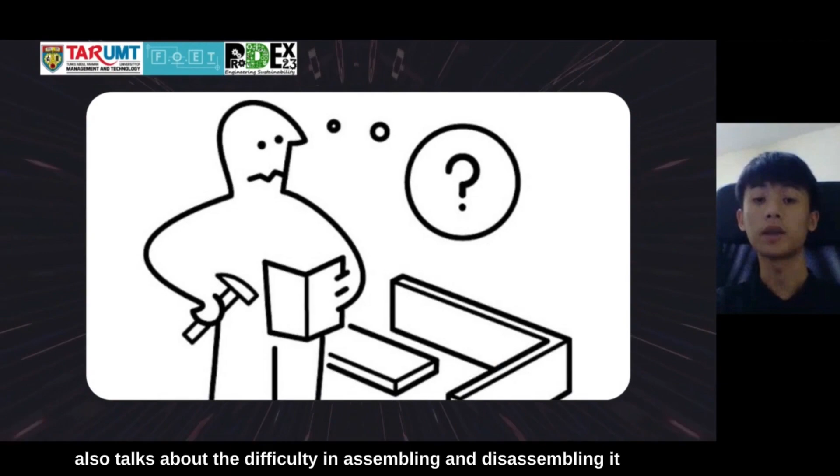The problem statement talks about the disadvantages of using drones in precision agriculture, including limited flight duration due to battery life, difficulty in assembling and disassembling it, as well as high initial purchase cost. So this is the drone that we are proposing as a prototype.

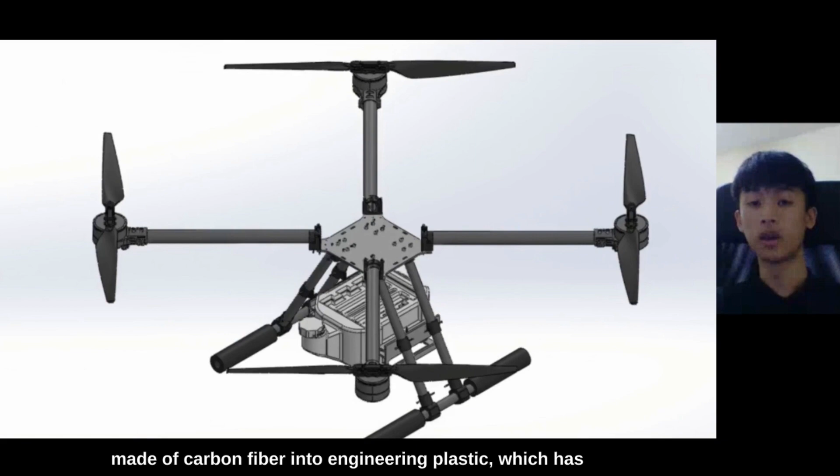For the project objective, our design has a reduced body frame weight, which leads to a larger flight duration due to its lightweight. Also, we have replaced the pipes that were initially made of carbon fiber into engineering plastic, which has resulted in a lower initial purchase cost. Last but not least, the design has an easy fastening mechanism with the use of locking pins.

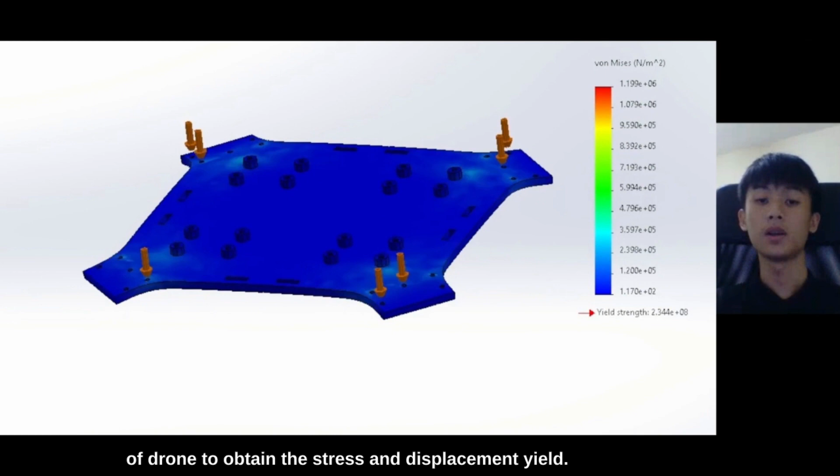For the simulation, a Von Mises stress simulation was conducted on a plate of the drone to obtain the stress and displacement yield with a force of 30 Newton on each side. The highest value of stress is 1.199 meganewton per meter square, locating at the corners of the plate. The highest displacement obtained is 1.947 micrometers, occurring at the edge of the corners of the plate.

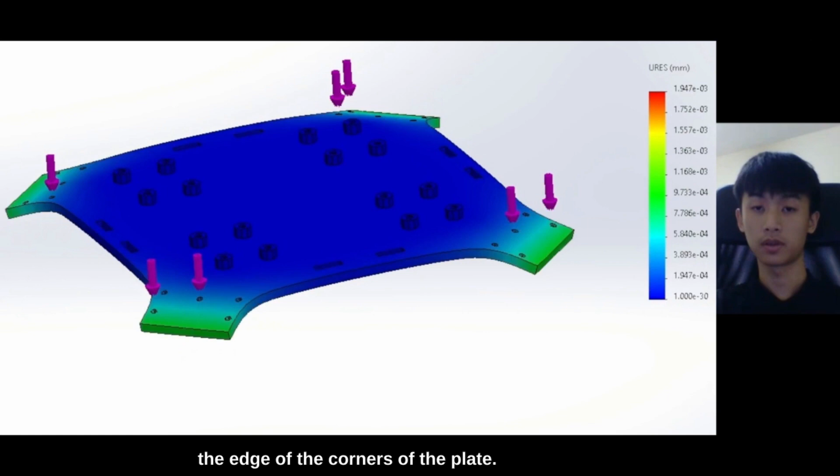For the fastening mechanism, the locking pins are used to assemble the propeller pipe with the propeller holder. Other than that, it is also used to assemble the landing gear with the bracket, landing gear with the spraying tank holder, as well as the landing gear and the base.

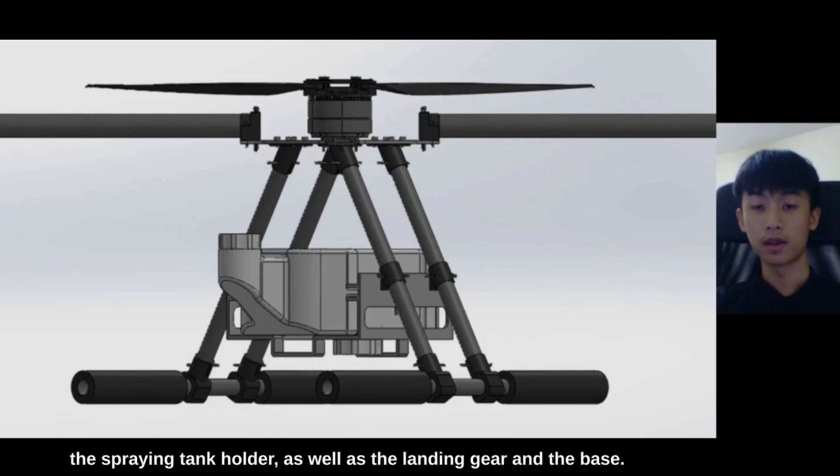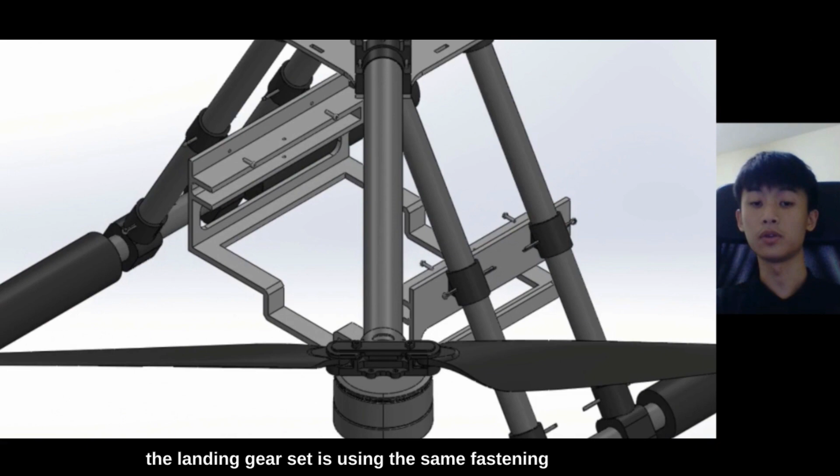For another fastening mechanism, this is a conventional fastening mechanism using the M3 hex socket head screw with a threaded insert, used to assemble the landing gear set with the plate. Also, the assembly of the spraying tank holder and the landing gear set uses the same fastening method, so the spraying tank can be inserted easily. Once the tank is in place, locking pins will be used to secure the tank from slipping out.